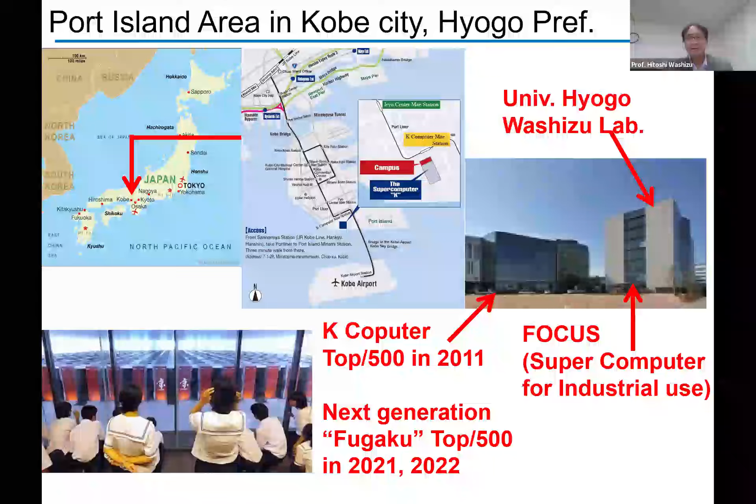In our university, we are also educating students. This is a figure of my laboratory. I made this picture because there are too many PhD students from industry—here are the names of the corporations. So many people are interested in doing tribology or surface science simulation from the molecular level.

We also have master's course students, and we have collaborators. One of my strong collaborators is I²CNER University.

So we are doing the mesoscale simulation to the nanoscale simulation. Now the very hot field for material simulation is the simulation technique from the bottom up, from the quantum level to the atomistic level. There's a lot of research here, but our main interest is in much more coarse grain model.

Here's the atomistic model, and here's a coarse grain model. In this coarse graining method, there is no unique established technique, so we have to make one. For example, collaboration of molecular motion and fluid dynamics is one topic, and this is very hot for us because it has many industrial applications.

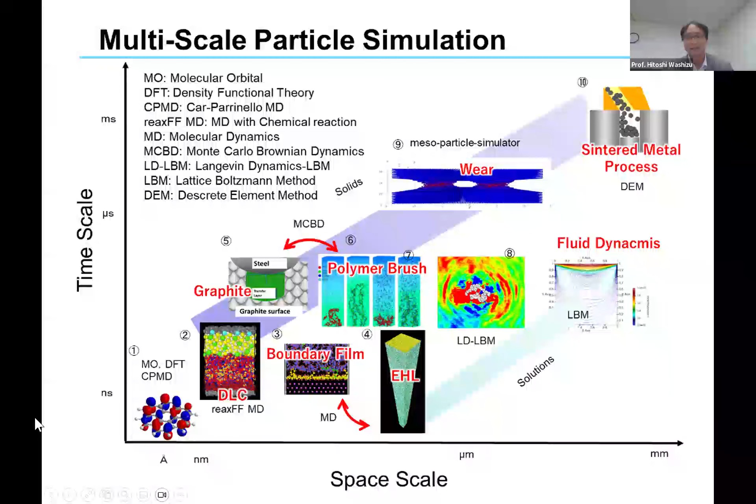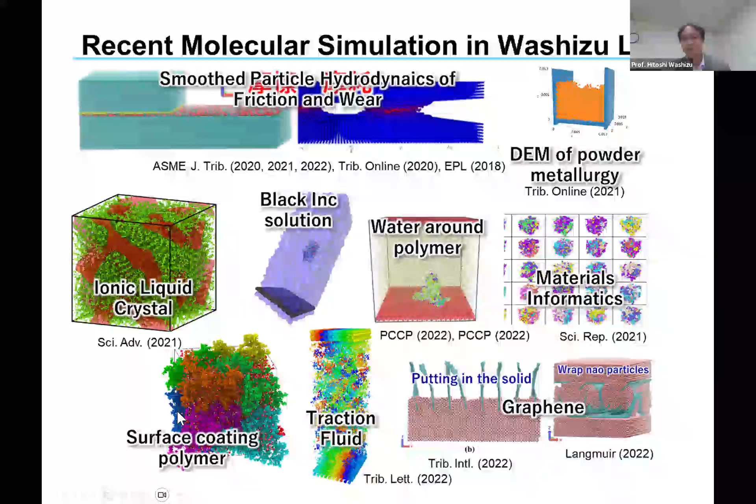If you're an experimental researcher, I will explain this briefly. We solve the equation of motion using the classical Newton equation of motion: F equals m times A, where A is acceleration. This F is named, in our field, the force field. We solve the equation of motion of the atoms, and if the force field is realistic, the motion of the atom becomes realistic.

The force field is a set of formulas, and one of them is bond, between two atoms; angle, between three atoms; and torsion, which means that if there are four atoms, we make two planes, and so we can simulate the torsion. For organic molecules, torsion is very important.

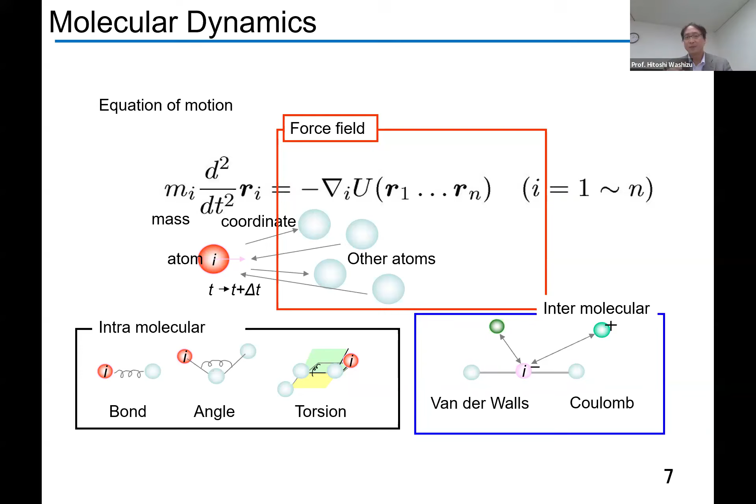Also important are the van der Waals and Coulomb interactions, because Coulomb interaction acts on the molecules. Electrons exist localized in some space, like molecular charge, so between two localized atoms we should calculate the Coulomb interaction more precisely. We put these sets of equations into the force field as parameters, which are usually calculated from much more precise quantum simulation. For example, partial charge is important.

So we made some new technique to simulate liquid crystal molecules. Here's the liquid crystal part, and here's the ionic liquid part, and these are combined. From the experimental point of view, Professor Kato at the University of Tokyo made this kind of molecule, which forms a self-organized structure like 3D or quasi-1D, but it's difficult to simulate by computer. So we made a modification of the technique to assign the partial charge in each atom.

These ionic moieties have a very strong charge. In the gas phase, they have -1 and +1 electrons, but in the condensed phase it's not true, because the electrons go out to the other environment. So at first we calculate by molecular dynamics simulation +1 and -1, then make a relaxation process to get a new configuration, then do quantum simulation and assign the new partial charge in each atom. Finally we can get a stable partial charge.

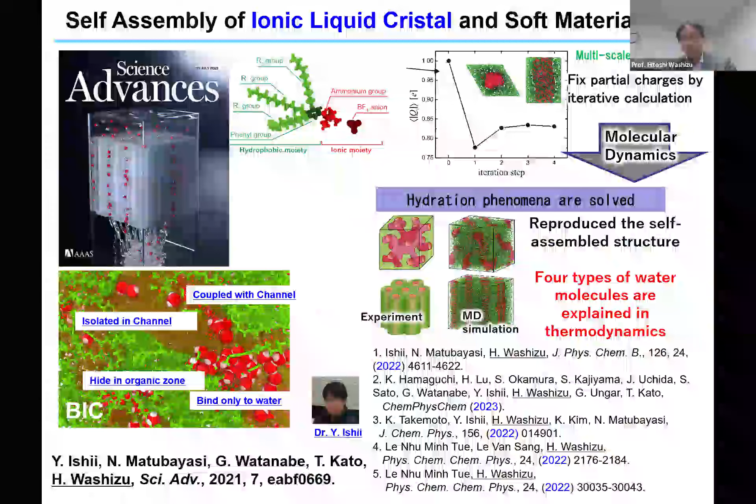And this is a technique to simulate the atoms, and how to understand and analyze the results.

So we are not only doing tribology, but after this I'd like to talk about tribology much more.

Let's think about the origin of friction. I talk to my students that for superconductivity or superfluidity, there is experimental evidence, and there are well-established theories to understand these phenomena.

But for superlubricity, there's experimental evidence, but there's no well-established theory. So if you are a theoretician or an experimentalist, please do solve this problem. The origin of friction is still an open question.

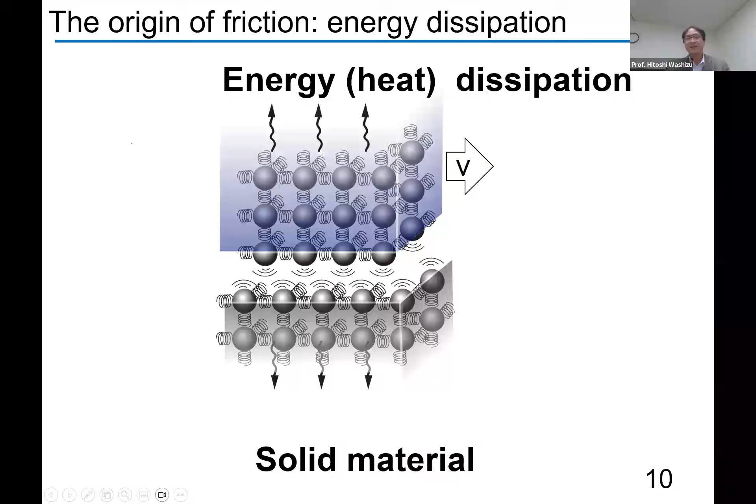But we know that if two solid materials are faced together, energy goes to the upper side or lower side. We call this heat dissipation. So we made this kind of model.

This kind of model has been discussed since the 1990s or so, and many used the FKT or Prandtl-Tomlinson model. This model has a very stiff surface, and there's only one layer of atoms bound here.

But we made it so that, in reality - I'm half a physicist and half a chemist - I'd like to use a much more realistic system.

A much more realistic system is one where we add a number of atoms on the bulk side. Then we calculated the friction. So what happened?

We used parameters for diamond, spring constant, and mass. 10 meters per second is a little bit slower from the molecular point of view, but I used to work in the automotive industry, and this is a realistic speed for a combustion engine.

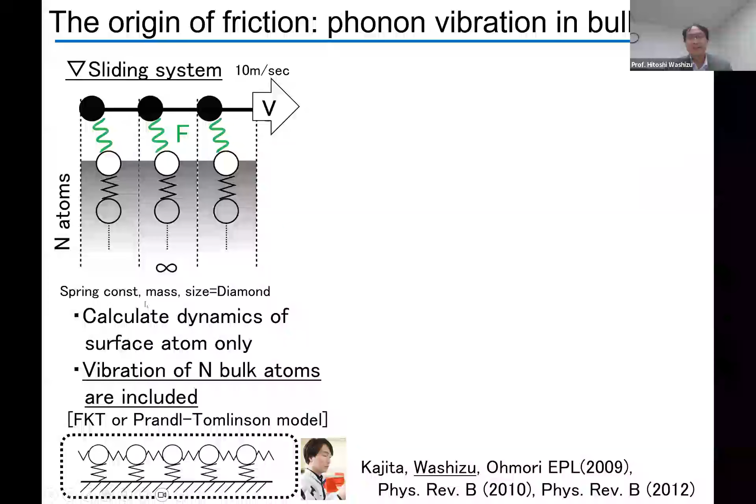We put in these kinds of parameters and then calculated this. If there's only a single atom, the coefficient of friction is very low. This is because the bond is very stiff and the bond parameter is high, so they do not move, so energy dissipation cannot occur.

But if we add some number of atoms in the deep bulk side - 100, 300, and 1000 - these are obtained by simulation. This infinite value was calculated by Dr. Kajita-kun, who was very young and did very good theoretical work. He calculated the infinite case, and the simulation value at 1000 matches the infinite value.

This means that the origin of friction is phonon vibration in the bulk, occurring over about 1000 atoms. Of course this depends on the material, but for diamond, it's about 1000.

So the origin of the friction is due to phonon dissipation into the bulk atoms. The theory of super lubricity is that the pitch of the atoms are one by one. This means there's a potential barrier, and every atom climbs a barrier, then vibrates, and heat dissipates in the bulk. So this is a mechanism.

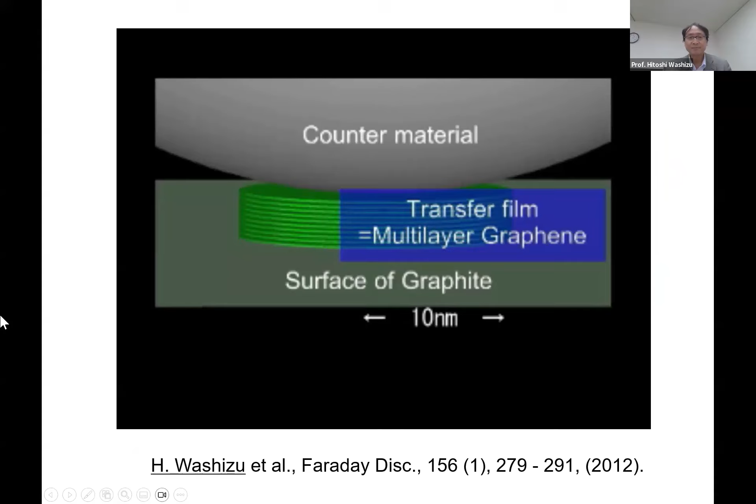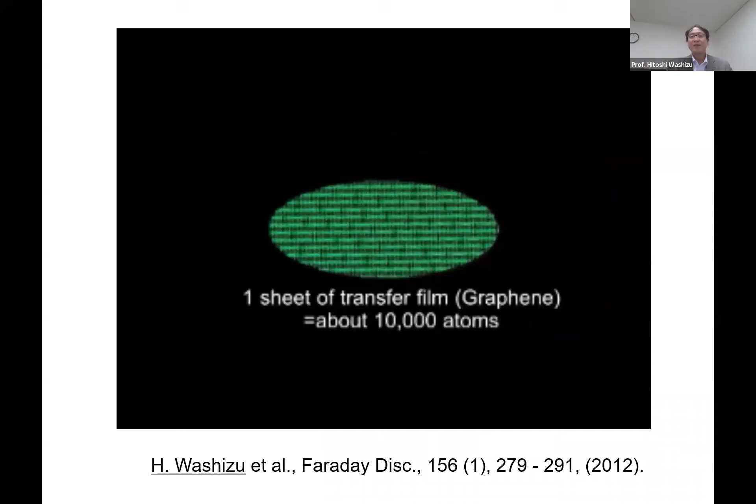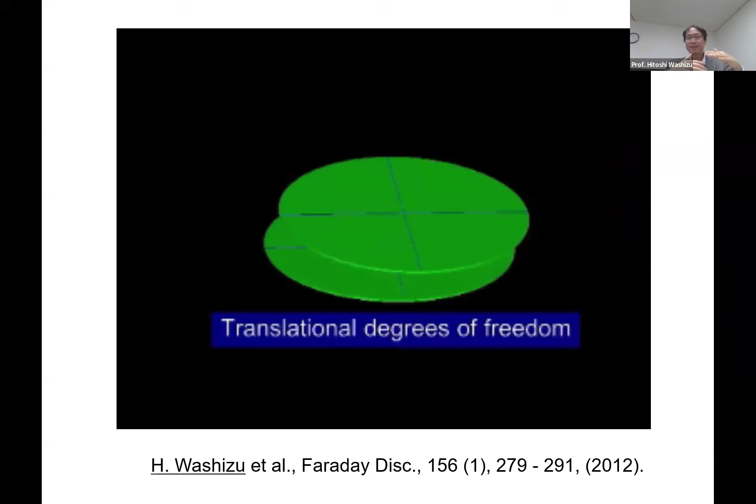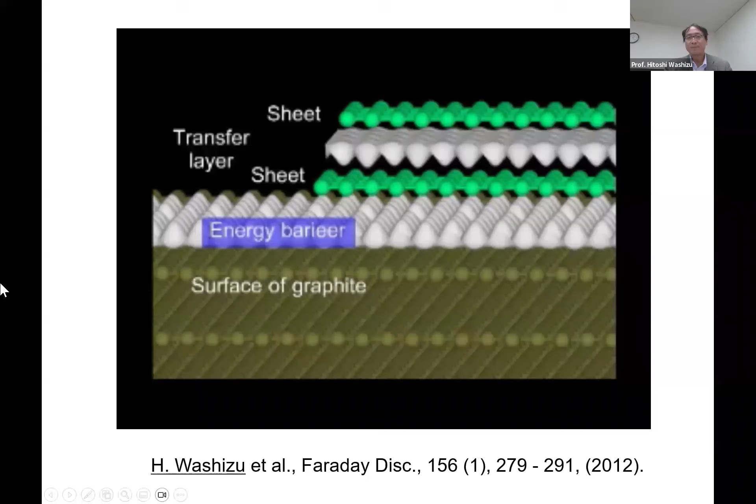But in practice, we use this kind of material named layered material. We made some model, but to compare with experiments, these are too large, so we need to coarse grain the model. We coarse grain to one sheet, and this enables us to simulate a huge amount of atoms. But we introduced translational and rotational degrees of freedom, because in incommensurate states, it's not like this. Also, the interaction between sheets is calculated very precisely for the potential parameter.

And then we put some sliding friction simulation. This mountain is a potential barrier between this red lowest sheet and the disk. We have 10 layers, and on the upper side we have another layer which slides at constant velocity. Okay, let's do the simulation.

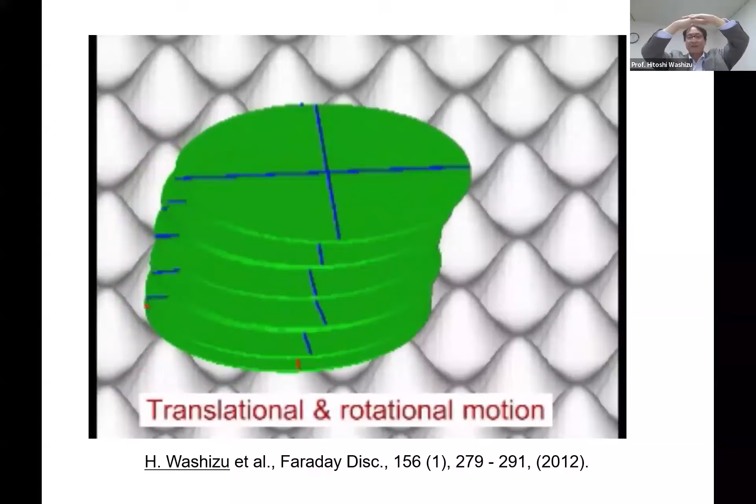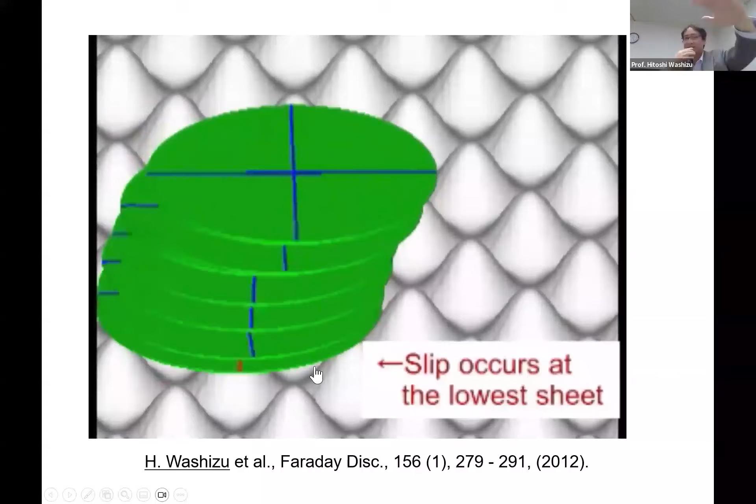You can see there are thermal vibrations. After sliding, it goes straight, but it's not incommensurate, it's commensurate. But you can see here that this lowest sheet is sliding like this, like dancing. It's not a simple interlayer slip.

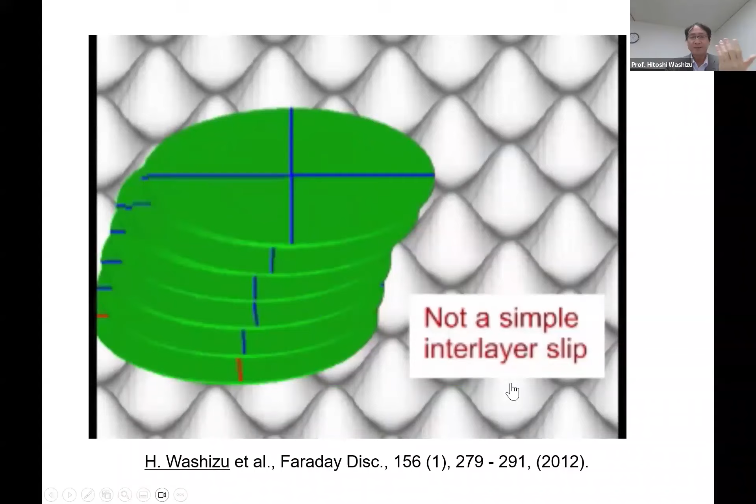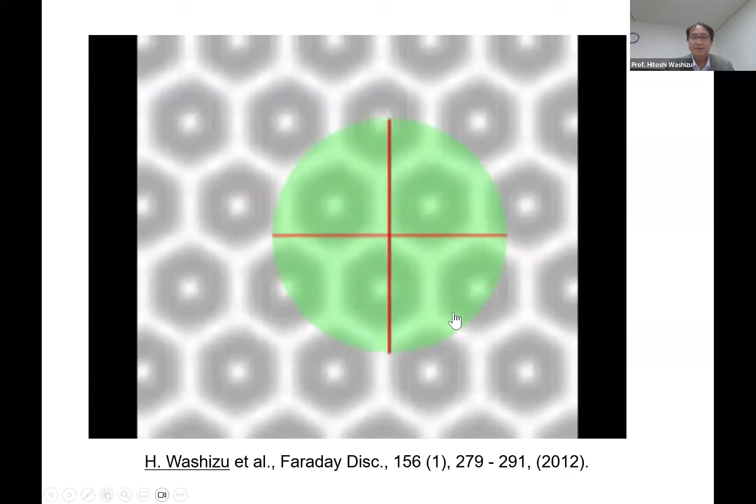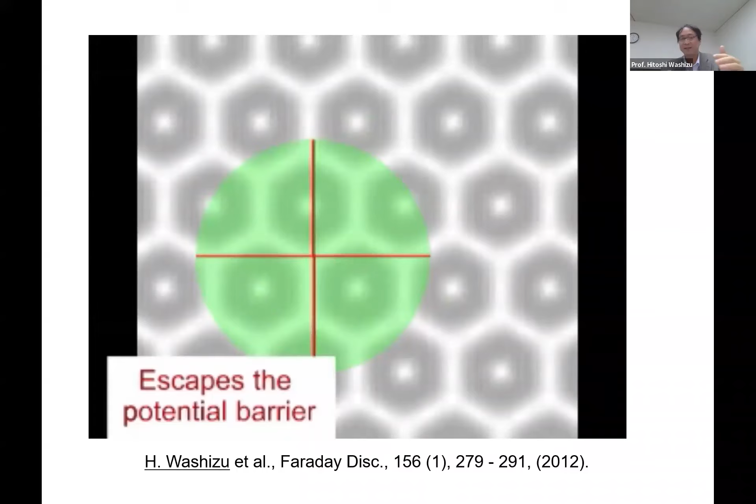Let's see from the upper side. You can see this is the top of the mountain, the potential barrier. After the simulation, it goes to this line, which is the valley of the potential barrier, and it's almost planar. So the force escapes the potential barrier, and it becomes very, very low friction. This is the reason why this kind of graphene makes very low friction.

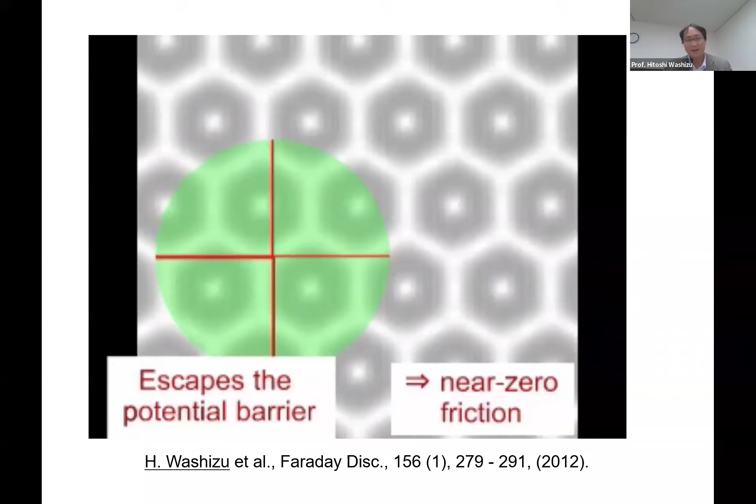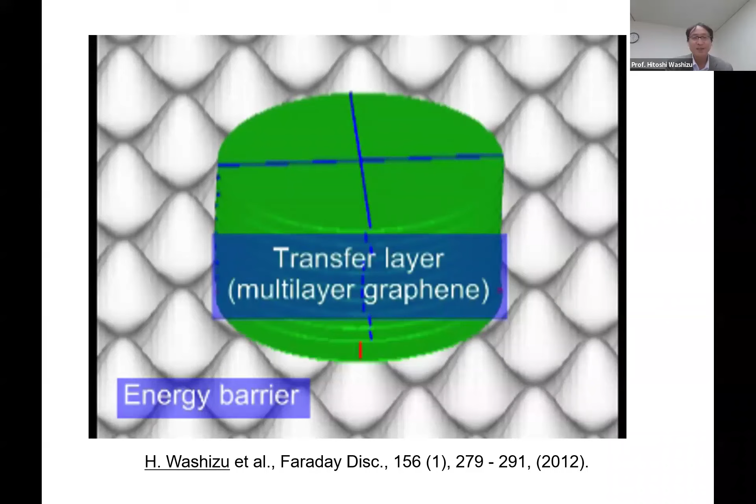We named this phenomenon as supported by thermal fluctuation, so I named it thermal escape motion. This occurs in the commensurate system. I believe this can be confirmed by other experiments, but it's still an open question. My paper is more than 10 years old, but not so often referenced. I think this is very important for explaining the mechanisms of low friction.

One realistic thing is that in the realistic system there are water molecules in the atmosphere, so we also simulated much more precisely, and this model is an all-atom molecular dynamics simulation. So the last figure was the coarse grain model, and this is a much more realistic model. We can confirm the realistic truth of the coarse grain simulation using a much smaller simulation, and we can include chemical effects, such as the effect of water molecules.

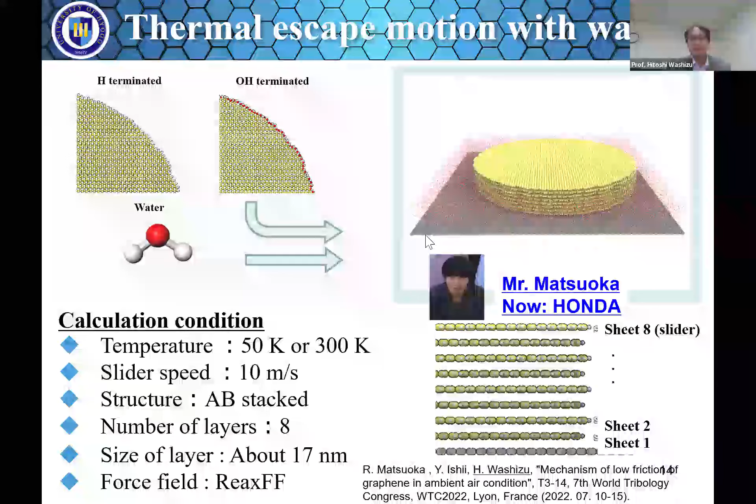All right, so this is one example of our basic research to understand friction. But today I'd like to explain the latter part of my talk, about much more coarse grain simulation for fluid and solid.

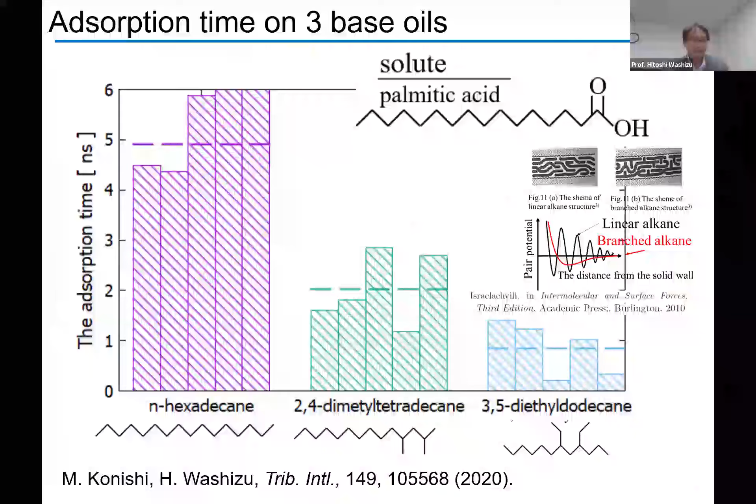So what can be done? Some experimentalists say that there are many chemical reactions on the surface, so we extended this to incorporate the chemical reaction.

But treating a chemical reaction in a molecular dynamics simulation is very difficult, because if the number of elements grows larger, the simulation becomes much more difficult, since we have to prepare the potential parameters. So in this new concept, the potential is the neural network potential.

This means that if there's some configuration of the atoms, then they calculate the potential energy. They did 10 million DFT, density functional theory, calculations, and then produced a potential energy figure introducing many kinds of elements. But this data is discrete.

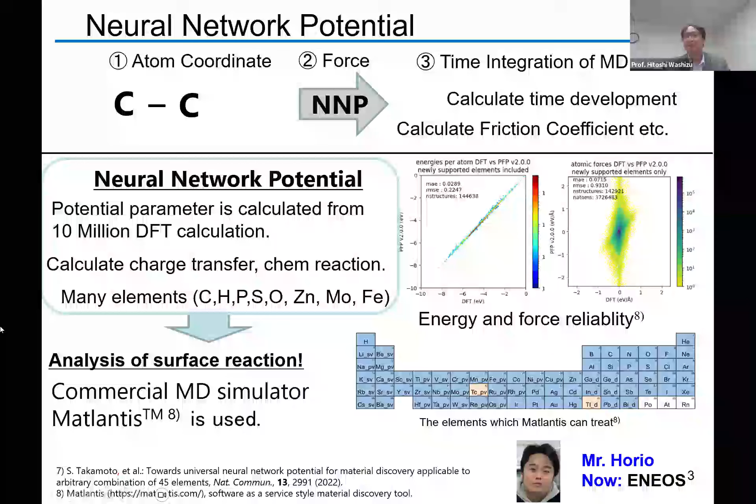In order to calculate the force, we need to have a difference, so we use the neural network to calculate the force. Every time we calculate the force, we predict the force by neural network, and then calculate this.

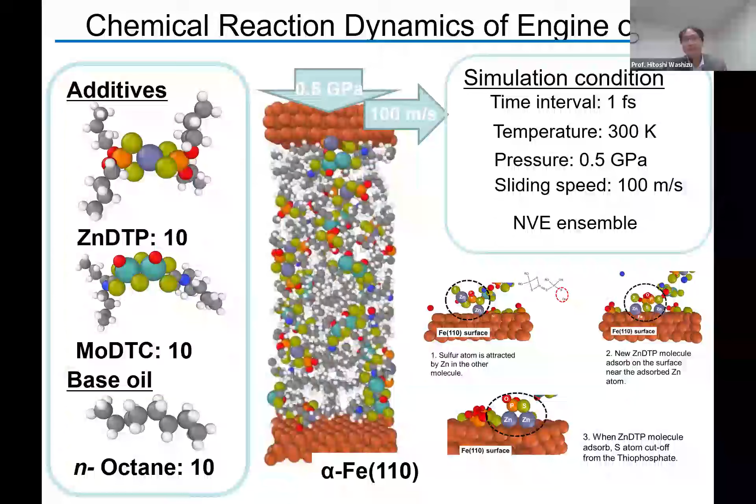Using this, another thing is the very basic concept of the Bowden and Tabor, and oiliness improver, which is like a fatty acid, which I previously showed. This works here, and these kinds of additives work at low temperature.

There's another kind of additive named EP additives, anti-wear additives, but these additives do not work at low temperature. Why is this? One has phosphate, this has carboxylate. Carboxylate works at low temperature, and phosphate works at high temperature.

What's the difference? So we calculated this. We prepared the phosphate molecules in the base oil, and then found that they make aggregates. It depends on the molecular structure, but they make aggregates, and the size of the aggregates depends on the additive molecular structure.

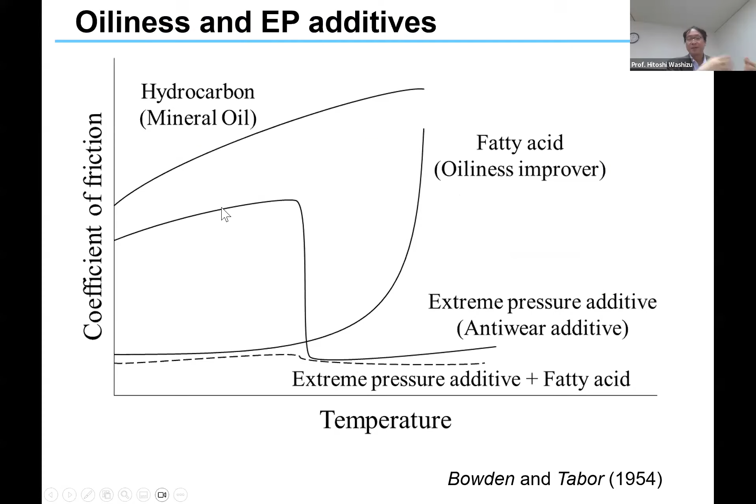In low temperature, they are very stable in the oil, so they do not reach the surface, because of the particle size and the diffusion coefficient, and diffusion is much smaller compared with single molecules. So surface interactions become rare with this kind of phosphate.

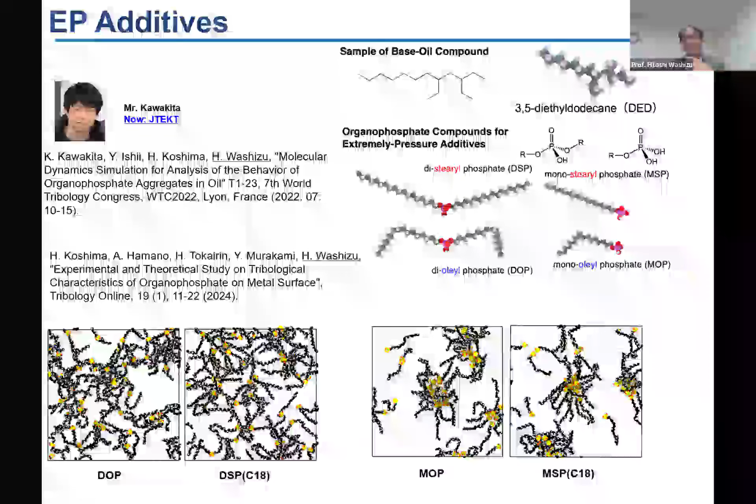I'd like to express that we can distinguish the difference between chemical structures on many sides. Maybe you may understand. Here's another example.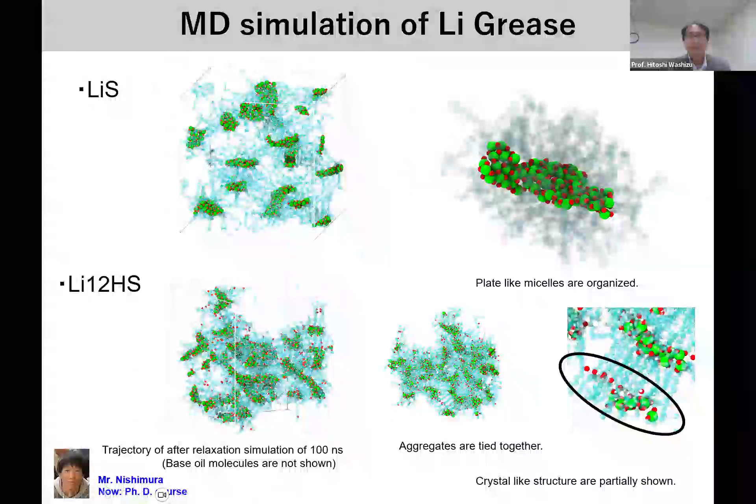In this case, the structure is much more isolated and they are separated, but here the aggregation combines together. This kind of difference can be explained by how the lithium ion is shared in the organic system.

Here's the OH group, and this is the end group, and the OH group interacts with the lithium ion, so the aggregates become larger. This kind of phenomenon is confirmed by experiments.

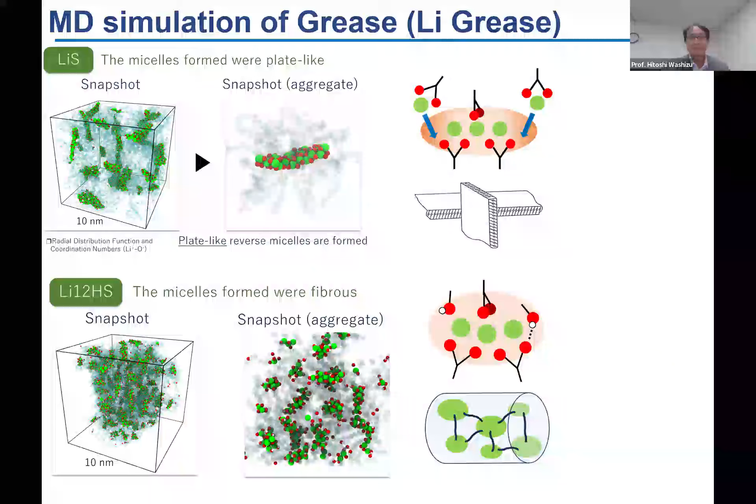But here's another thickener named urea grease, and the center of the thickener is the same, but some branches are different, like a circular one, an aromatic one, and this kind of other one.

So the structure of the aggregates is different, and this difference can be explained by the hydrogen bond. A hydrogen bond is a bond between the OH group and others, but here we have many charged parts, so they make some interaction, and this kind of difference occurs.

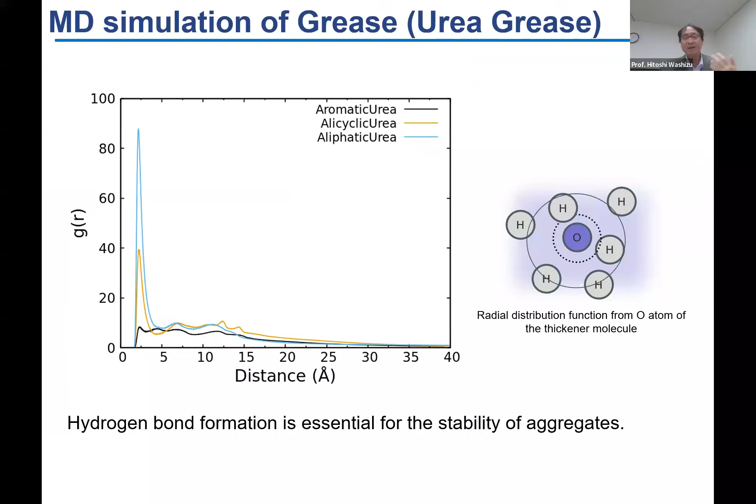Using molecular dynamics simulation is very useful to understand and explain many phenomena in the world of chemistry. But from the mechanical engineering point of view, we cannot explain this kind of fiber structure or much larger structure by chemistry, because only the very small partial structure of the micelle is reproduced by molecular dynamics simulation, but this kind of fiber structure cannot be treated.

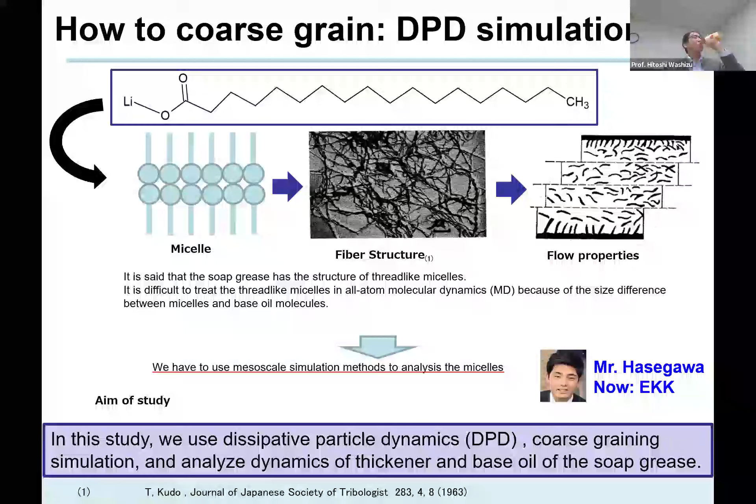So we used dissipative particle dynamics to make a model of this kind of thickener. In this dissipative particle dynamics, we coarse-grain the model like this. So we have many atoms for the base oil and the thickener, but we coarse-grain to only three spheres, and with this, only two spheres.

Then in the equation of motion, we include dissipative force and random force because there's thermal vibration here. So we have to introduce this kind of thermal effect, and then we can calculate this.

Here's a no-shear structure. They make a self-organization structure, and if we add some shear, we can get this kind of structure. Then under high shear, this kind of micelle breaks down, and we can obtain the viscosity.

The viscosity curve decreases in the first regime. The first regime is a rotation of this kind of micelle, fiber of the micelles, and then it becomes like this, and gets some plateau value. At much higher shear, the structure of the micelles breaks down.

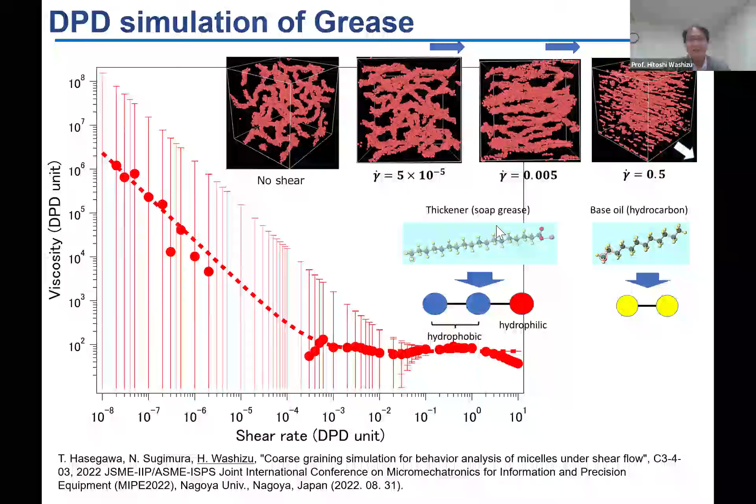So this kind of rheology curve is obtained by experiments, and we can model what's happening in this kind of situation. So it seems impressive. But more precisely speaking, the structure of this micelle is not equal to the structure of this other micelle.

So we need much more precise, but large space simulations. Let's go back to the DPD. DPD is like this, and we calculate the motion of

the equation of motion of solvents and solute both. The shear can be adapted easily, and it is very good, and the multiple coarse-grain system is like Brownian dynamics. But we do not introduce the motion of the solvents directly, so the calculation cost is low, but it is not precise.

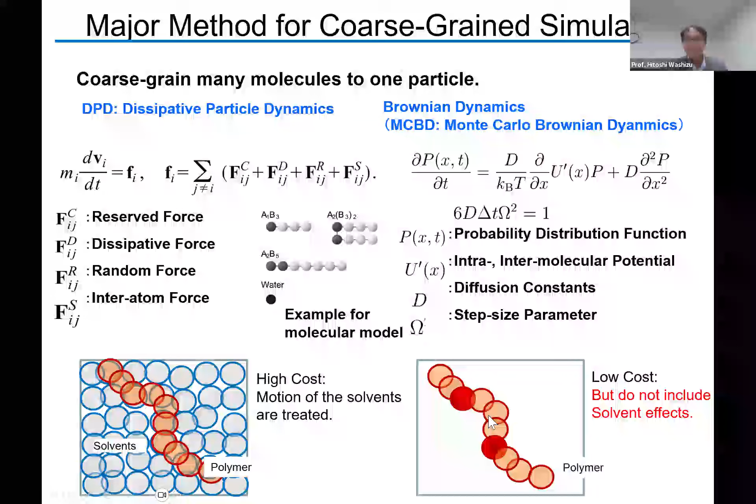So we made a new simulation that couples Brownian dynamics with lattice-Boltzmann. The concept is that we put some Brownian particle as a point charge, a point mass, and then calculate the force. Here's a force, and here's a force using the Navier-Stokes equation.

So here we can introduce some fluid dynamic effect much more correctly. And here's a velocity autocorrelation function. If there's no fluid effect, this green line shows that without hydrodynamics effect, this is a correlation between the velocity. Here's some velocity, and here's another.

Here's some velocity, and if there's velocity, there are solvents. So the solvents go this way, but they have Brownian motion, so they go to another side, and then they forget about the initial velocity. This is the green line.

But if there is the hydrodynamic force, then the solvent, the base oil, remembers this, and tells the particle, oh, you are going this way. So the velocity correlation after some seconds, they remember.

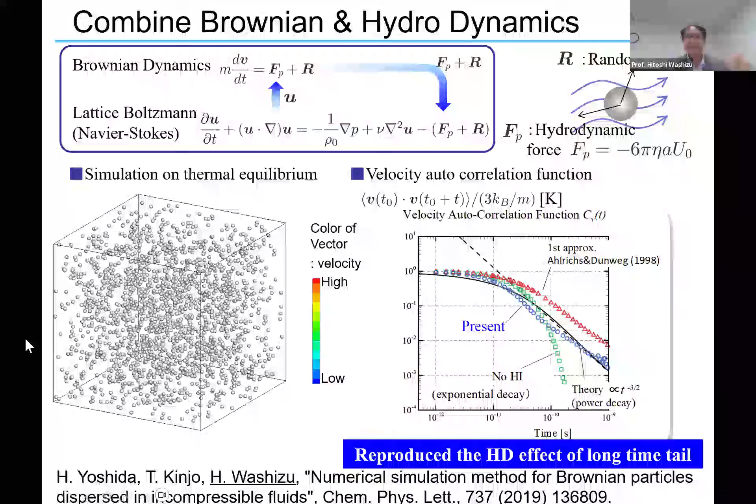This is named long time tail or memory effect, and this is correctly calculated. This means that the effect of the hydrodynamic force is calculated correctly, so we could combine this.

So this is an example for the shear. In the static condition, the mean square displacement depends on T, but under shear condition it depends on T cubic. This is named abnormal diffusion, and we could reproduce this and so on.

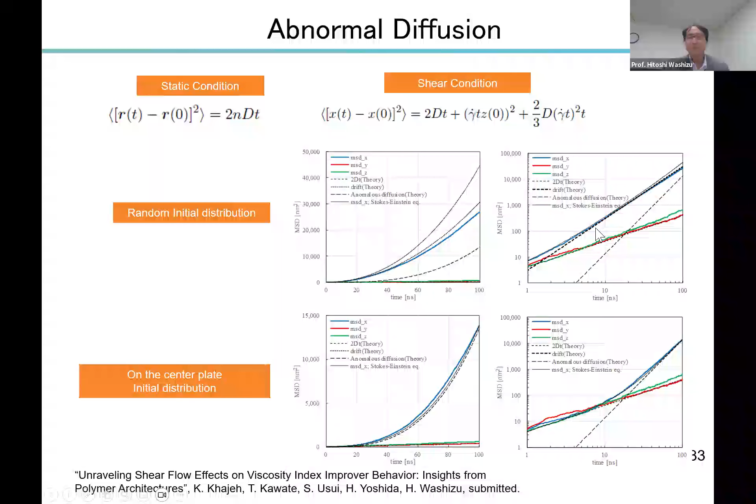One application to the oil is the viscosity index improver. I was working in the automotive industry, and the oil's viscosity has a temperature dependence.

Usually, the viscosity decreases with temperature increases. This means that in the beginning, we use a very low viscosity oil to improve efficiency. This is in the winter.

Yesterday I was in Fukuoka, and it was a very low cold temperature. In the cold temperature, viscosity becomes lower, so it's very good. But after you put some engine on, heat generates, temperature rises, and this viscosity is too

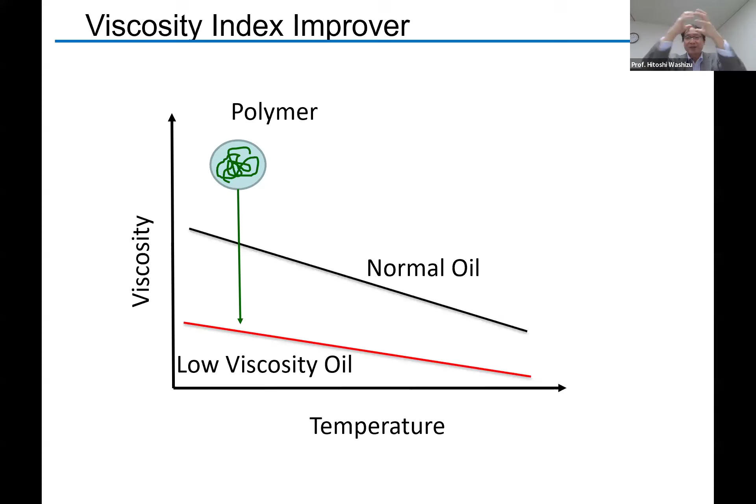short to make the lubrication film in the engine. So we put some polymer here. In the polymer, at low temperature, it is very small, but at high temperature it becomes larger due to the thermal effect. So we can improve the viscosity and make it less dependent on temperature. This is named viscosity index improver.

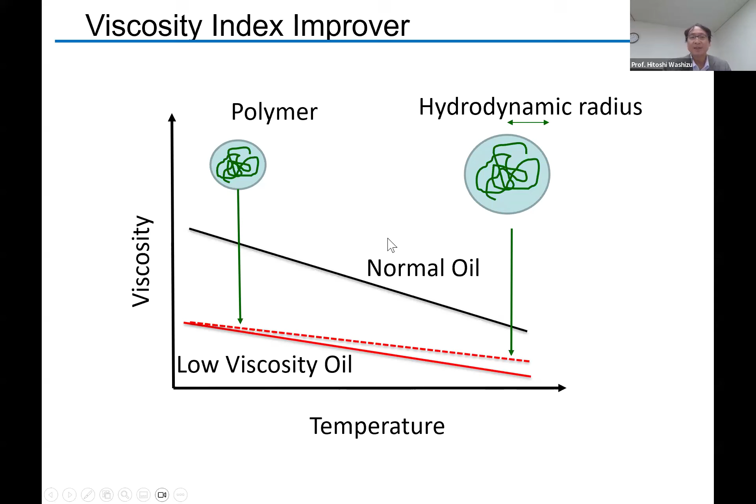Using this simulator, it is very easy to see in the static condition and in the shear condition. In the static condition, there's no shear, and the radius of gyration—the size of the polymer—is larger at high temperature. But in the shear condition, it is different.

In the high temperature, it is low. What's happening here is the X component, meaning the direction of the shear. So in the low temperature, viscosity of the oil is high, so the polymer is stretched in this direction.

So making some figures, it's like this: at low shear rate, the polymer blooms up, then viscosity rises, and we can make some large structures—we can keep the oil film.

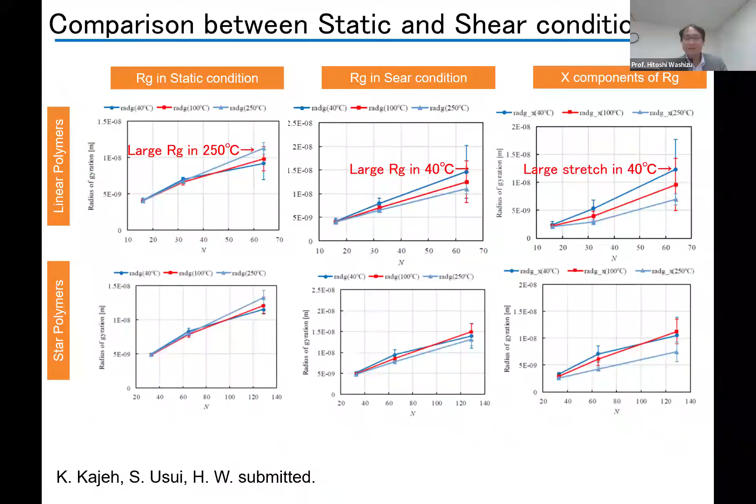At high shear rate, in the middle, the shear rate is high, so you don't need to enhance the viscosity. Here the polymer is stretched, so this does not affect the viscosity rising in the whole oil.

This effect was not explained before by experiment. So our simulation first explained this effect.

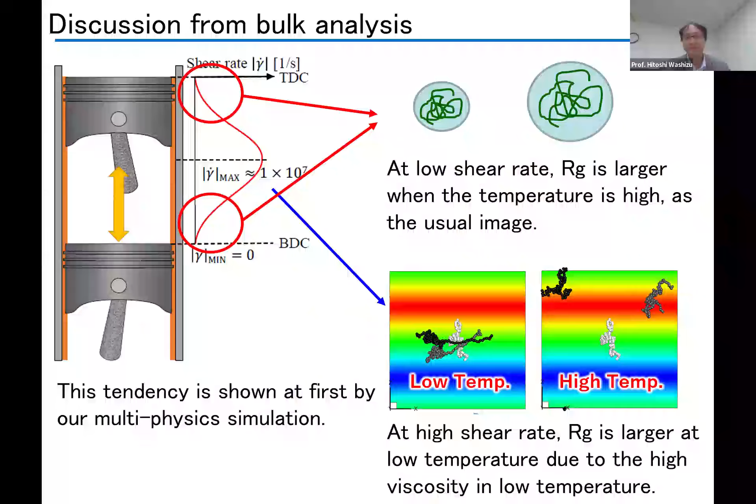There are many applications. We introduced some effect of charges, and this is the difference between dipole and non-dipole models. The structure of the polymer changes accordingly.

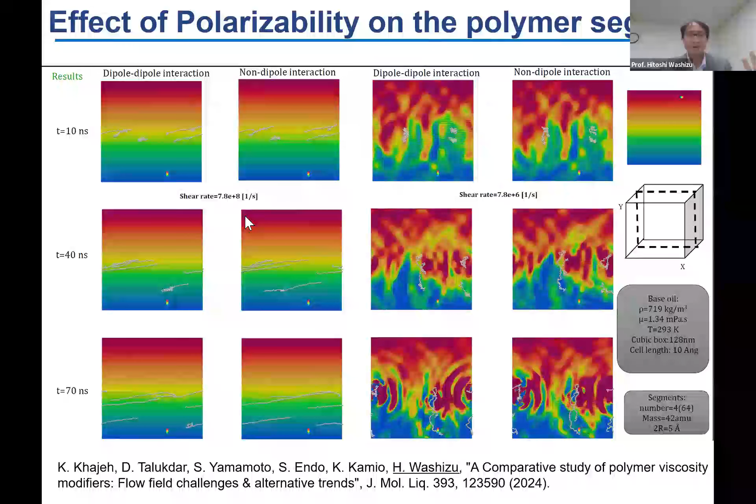This means we can make much more precise chemistry in this model, so this is very good. We are collaborating with a chemical company, Mitsui Kagaku, and we could explain which kind of viscosity modifier polymers are good for the dipole—I mean the polar system—and the non-polar system.

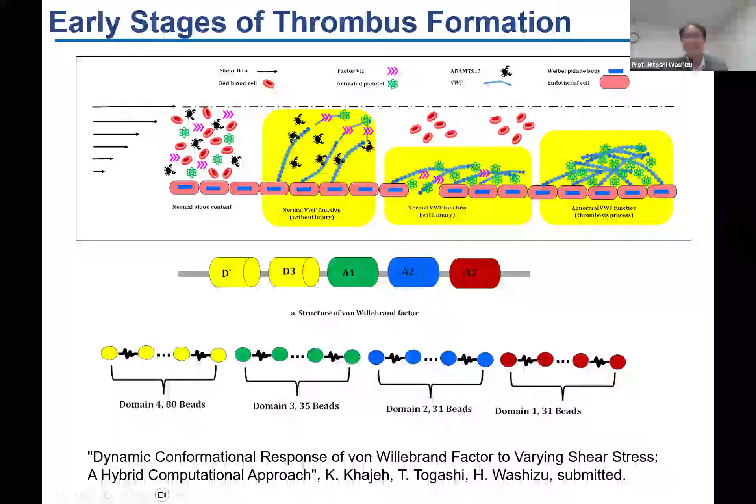We extended this to proteins, but I don't think I have enough time to explain. The structure of the polymer is different under shear. This means some biological effect is different, depending on the shear—the stable structure of the proteins is different at low shear and high shear.

If this can be related to some biological effect, I think we can make new science in biology, because protein folding is a very important field in biochemistry, but many studies discuss it in the static condition. In the shear condition, like in the blood, we need to understand the effect of the shear.

So this is one simulator made in our laboratory, and the model is about beads and polar residues and proteins. A united atom model is also already done, and one more thing is that parallelization and adoption of the GPU is very important.

We have some grants from NEDO for the wind turbine project, and we are extending to make much more effective, much better features in our fluid simulator.

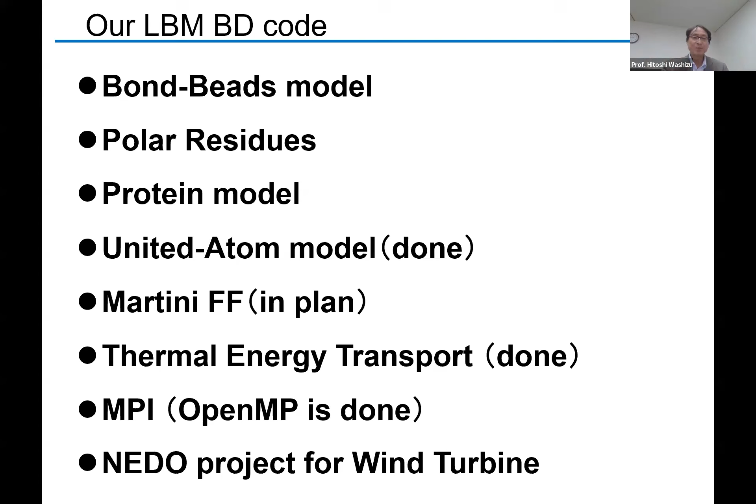The reason why we need a good simulator is that at the molecular level it is precise and chemically correct, but we need to coarse grain to understand what's happening in a much larger region, like the grease or some polymers, aggregates, and additives.

So we made a tribology fluid simulator here. In the last part of my talk, I will explain about the mesoscale tribology SPH simulator. These tools are original techniques, and these are basic techniques. We use a particle simulator made by the Makino Group, and this is named FDPS.

FDPS is the framework for developing a particle simulator. Particle simulation is not so well established compared with FEM or other more classical mechanical engineering techniques.

They are doing astronomic physics, like calculating galaxies and so on. In a galaxy there are many particles, and the interactions must be calculated correctly, but there are too many particles. So to analyze mesoscale phenomena, we use SPH, a smooth particle hydrodynamics method, but it's not only for hydrodynamics - we can also simulate solids.

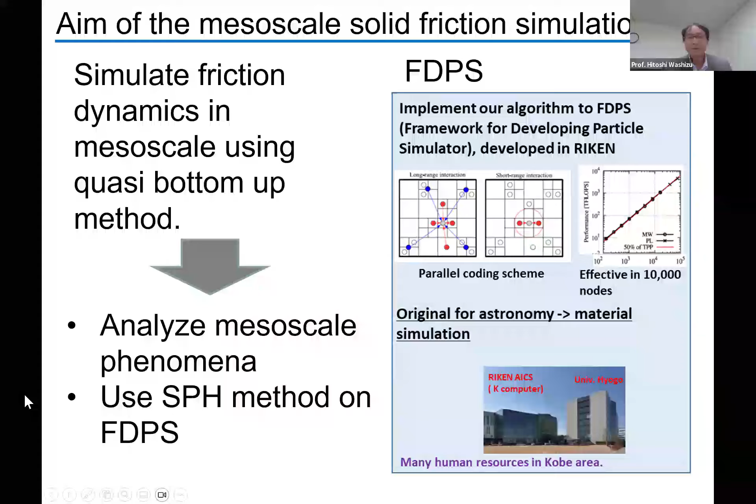We made some simulators based on FDPS because we are located nearby. Okay, here's one topic.

Friction occurs like here, but if we'd like to understand not only the friction but the wear or some destruction of the surface, like seizure and so on, we need to simulate a much larger space.

By molecular dynamics simulation we can only treat a small space, like a few nanometers. If we use a larger scale, like 10 nanometers or 30 nanometers, it's okay - it's very good for molecular dynamics simulation.

But the tribology effect happens in a much larger system, like 1 millimeter or sub-micro, sub-milli scale. And if we rub here at very high speed between metal and metal, heat generates and the temperature grows and it ends.

But at first, we call this the real contact area. In the real contact area, at first there is very mild friction, but heat generates and comes to this surface, and then second time contact, third time contact, and then something wrong happens or not.

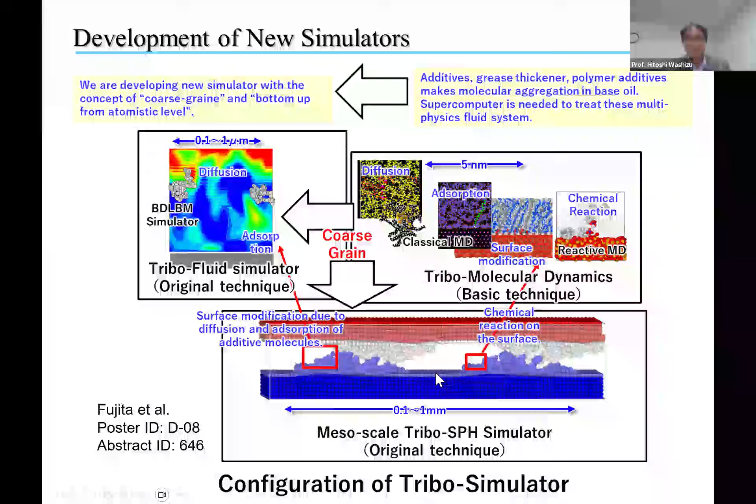So, to understand the phenomena in this area, we need to make a much larger system, so we need to coarse grain the solid materials.

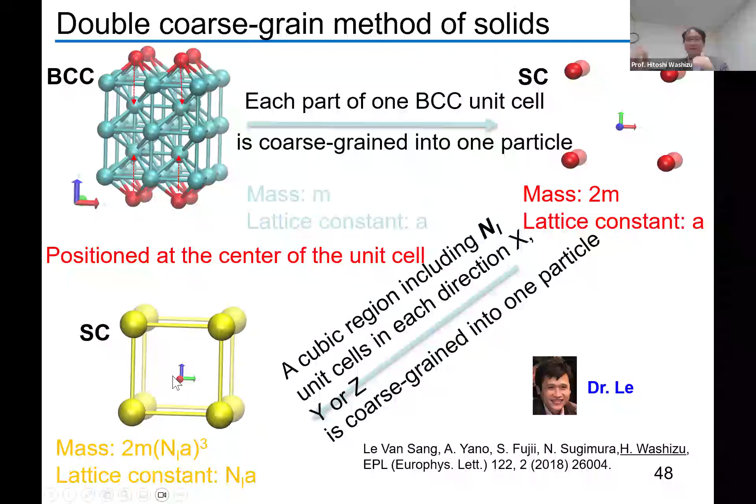This is an example of making coarse grain particles of metals, but we do a second time coarse graining - first coarse grain and second coarse grain. Then after that, we use some equation of motion. If you are interested, this paper describes a much more precise method. But finally, we can have this kind of very basic concept model.

Here we put some SPH particles, and here's some other particles. Then in this red and blue part, on layer 3 and 4, we calculate the dissipation force and Tomlinson force and some interface interaction like this. And then we have some friction.

And here you can see the load dependence - these kinds of phenomena are obtained by experiments, and then we can reproduce them here.

Here's another one - heat generation and temperature. So in part 1, 2, 3, 4, the heat generates here, and then it goes to another part, and diffusion occurs - heat diffusion occurs - and then another part, the temperature rises, the third part and fourth part rise. This means we can correctly calculate the force, heat generation, and heat diffusion.

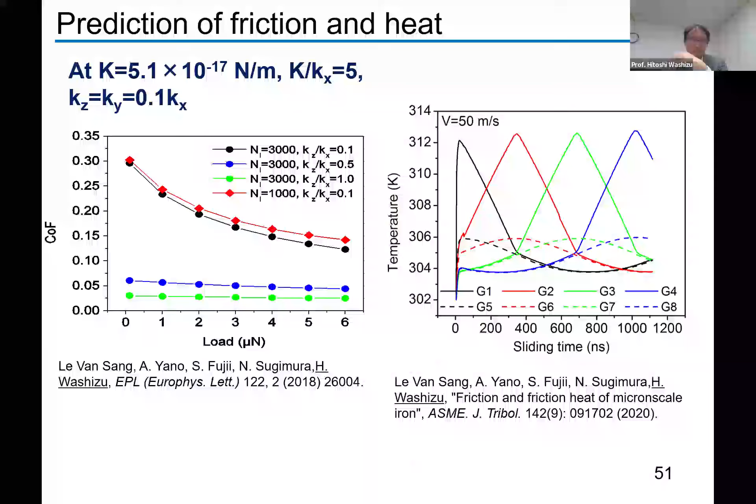And some fluid motion. In this case, bottom-up simulation can do the surface interaction between these kinds of three materials. We calculate some molecular dynamics simulation and calculate the force interaction correctly, and then have some result.

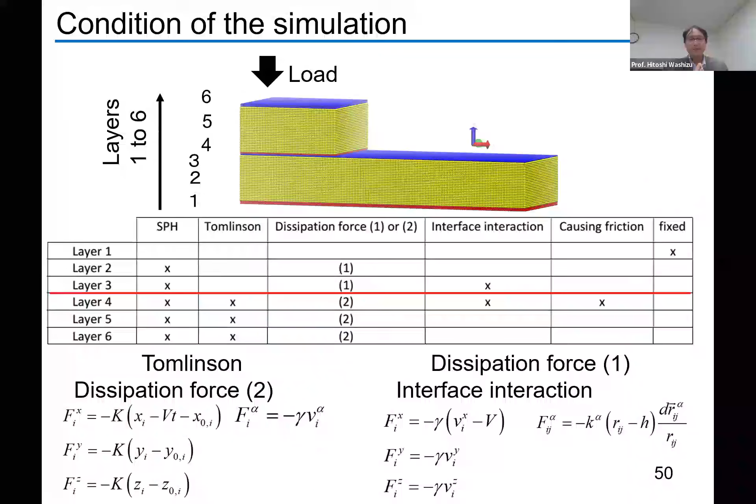But the last topic is about much more wear, seizure, and heavy conditions. In this part, in this simulation, we only use the elastic interaction, but many materials have elastic-plastic interaction.

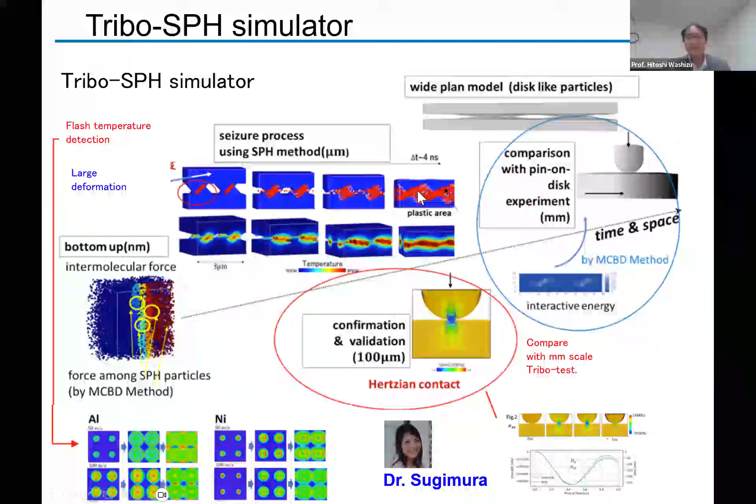So in heavy conditions, they move not only through elastic but also plastic deformation, and then the surface structure changes, and friction occurs. So Dr. Sugimura made a bottom-up concept to simulate, including the elastic-plastic deformation feature, into this kind of SPH particles. This is one feature, and here shows the temperature difference.

So here we are rubbing aluminum and nickel. You can see that aluminum has very good heat conduction, so heat goes to every other part. This is picking up some temperature of the sliding surface, so heat can easily dissipate in this way.

But in nickel, heat conduction is not so good, so the heat energy remains on the surface. It goes like this red line, and the red place remains after this sliding.

On the other hand, nickel is much more elastic, a much harder material, while aluminum is much softer, so this is elastic or plastic. If it's going to the elastic part we put some red sign - nickel is elastic, aluminum is plastic. So we can distinguish what's happening in the real contact area, including heat dissipation and heat conduction, and so on.

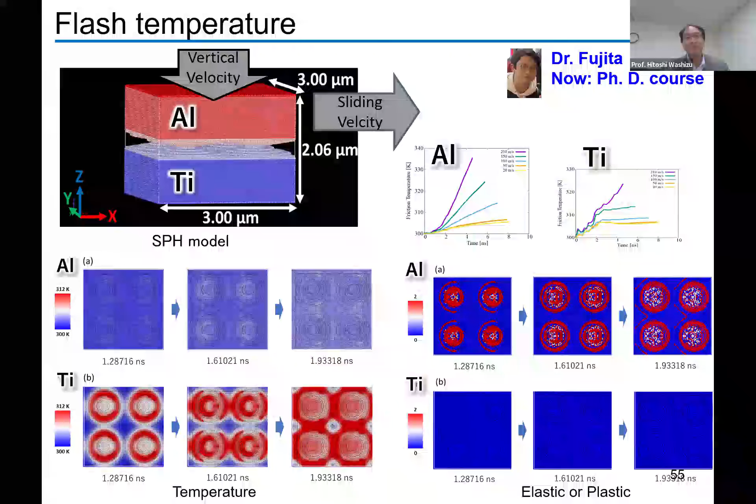In very classic experiments, a professor in the UK called this kind of temperature rise the hot spot, or flash temperature. Flash temperature can be described theoretically using this kind of simulator. But this kind of surface roughness is very artificial, and in a realistic system it looks like this, so we extended this.

One more thing is that we changed some sphere particles to coin-like particles. Using coin-like particles, lubrication occurs in this kind of anisotropic system, meaning in the sliding direction it's much larger, but on this side it's not - the length scale between this side and that side is different. So we made some coin-like structure, and here are the basics.

So temperature rises in the real contact area can be simulated using this new simulation technique. This is almost a conclusion: multi-physics simulation is developed to analyze the motion of polymer from metal and polymer systems, and we can reproduce and model the heat generation and heat conduction in the real contact area.

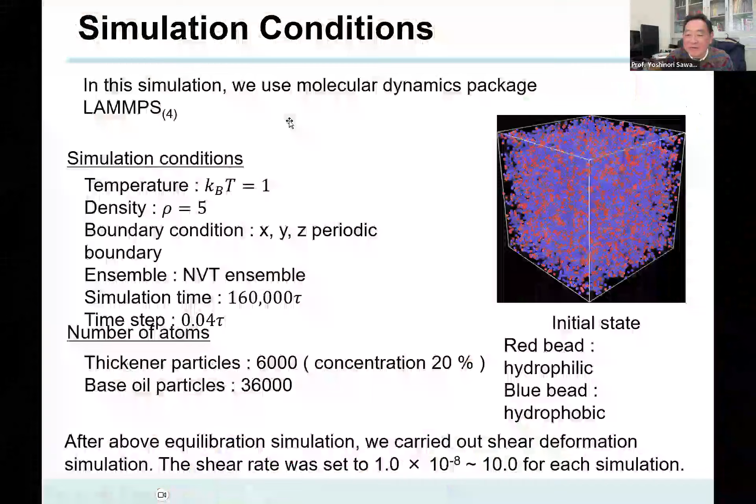Thank you very much, Washizu Sensei, very excellent talk and very educational - we learned a lot about diverse topics in multi-scale simulation in the field of tribology. Unfortunately the schedule is behind, but if there are some questions we'd like to have one or two. Please raise your hand using the raise hand button. Any questions? Professor Kubota, please. Thank you very much.

Thank you very much, Washizu Sensei. Today, I have learned a lot of things about the great potential for the simulation for tribological phenomena.

My question is concerned about catalytic action under extreme conditions. I believe that the contact surface is subjected to ultra-high contact pressure, where the surface can cause plastic deformation. So, in this context, how do you think contact pressure and plastic deformation affect the catalytic action of the surface?

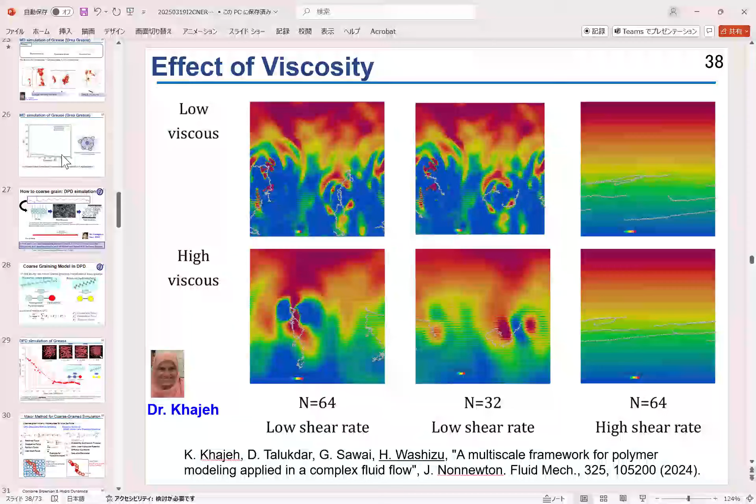Thank you so much for your very, very nice talk. And I'm very interested in grease lubrication. As you know, grease lubrication has a very, very wide range of distance in vertical direction and also horizontal direction. Do you have any coarse graining method applied to this phenomena? And also, how do you think about this wide range of distance in your calculation?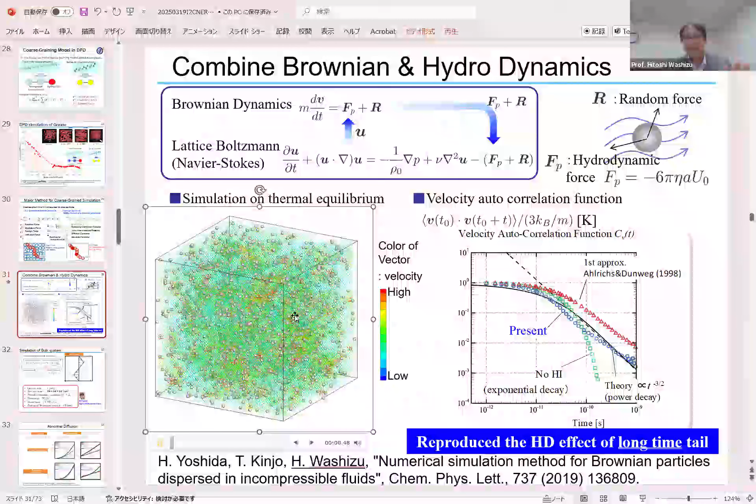Yes, yes, very good question. Thank you. So in this simulator, the size of the particle can be varied. The smallest size is the united atom, meaning that CH2 is one particle, okay? And the middle and the large. So in order to, because this is a coarse grain model, the size of this particle is not limited.

Okay, so if you want to simulate the whole grease, maybe we can coarse grain to this size, and then if we want to understand this size phenomena, maybe the middle particle can be used. So we can vary the model to focus on which phenomena we'd like to understand, but whole phenomena in one simulation is difficult, I think. Yes, thank you, I understand. Thank you so much.

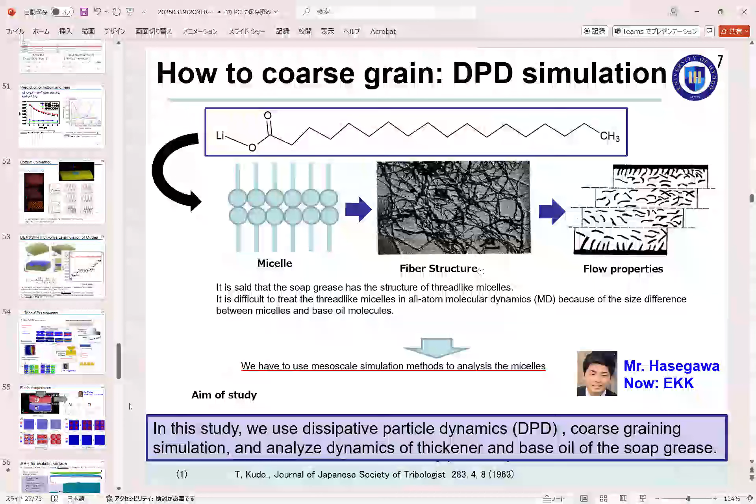For SPH simulations, it seems to be very suitable for dealing with large-scale phenomena. But in your simulation, asperity contact, I think there are many complicated phenomena in grain structure, phase transformation, and breakdown of grain structure. Do you have any plan and idea how you consider phase transformation and the change in size of grain structure and so on?

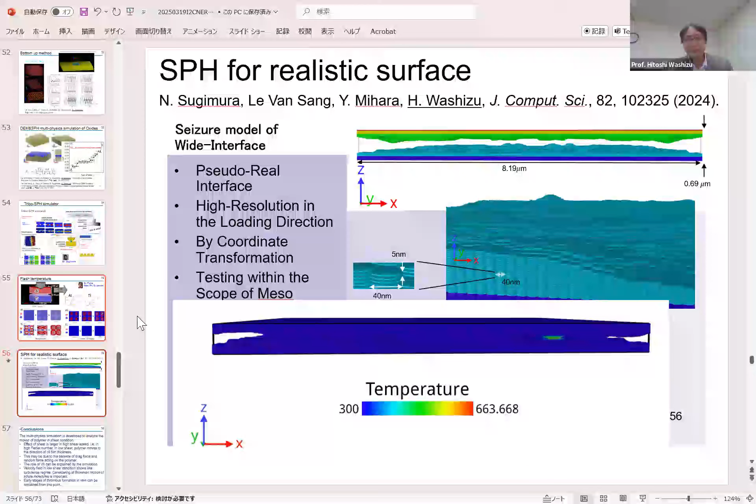Yes. One thing is that the torsional, I mean some tensor-like effect is already introduced in this model. So this tensor-like deformation can be included, but now in our present model we don't introduce a multi-grain system. I think we can theoretically introduce this by combining the SPH with some phase transition effect.

Using some other equation of motion, like, I forgot, some other method maybe used in other metal science. So grain boundary and formation of grain and so on can be extended in future, but it is, I think, difficult in the near future. Yeah, very difficult. But I think it is possible in the future. Yes. Okay, thank you very much.